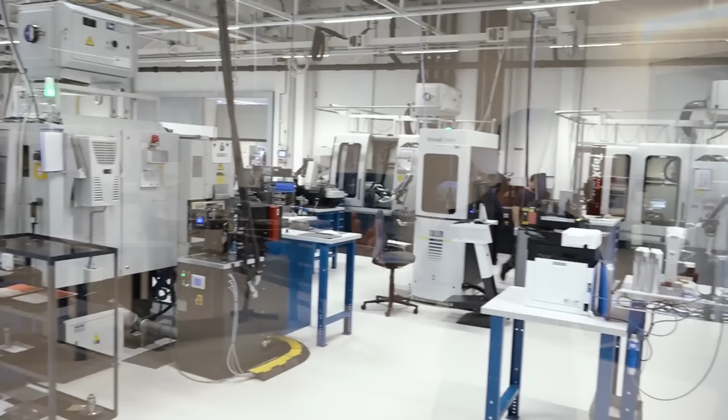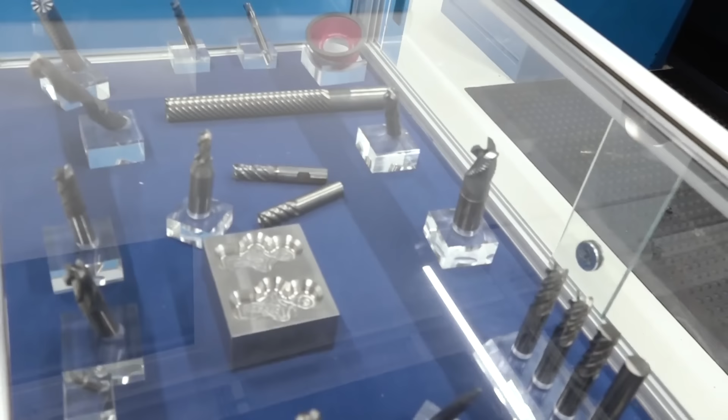I'm already seeing what looks to be dozens and dozens of grinding machines, which is obviously the core of what you're doing here. Absolutely - solid carbide is our passion for precision. You see here different tools, mostly different diameters and lengths, but more of the bigger ones here. So here it's really going on with powerful grinding technology on these Reinecker machines. You see also how we produce those tools: first there's always a rod, we put it in the machine's clamping system, then we go with the grinding wheel in a slotting process. The main material of the tool gets removed, and then finally we do the sharpening and finishing on the front part of the tool. You see all the other ones with a lot of teeth here - those are finishing tools. We grind for such a tool about 60 minutes, so an hour for one tool. There are other ones we produce faster, but it's really different here.

You know, I come from the machining world, and currently we discuss all the time doing things in one operation and reducing cycle times. Are you doing the same thing inside the grinding machines - putting in raw material and taking out a finished cutting tool, doing your best to combine operations and take cycle times from say 30 minutes down to 5 minutes? Are you doing all of that to keep up with demands, especially since you guys continue to grow globally?

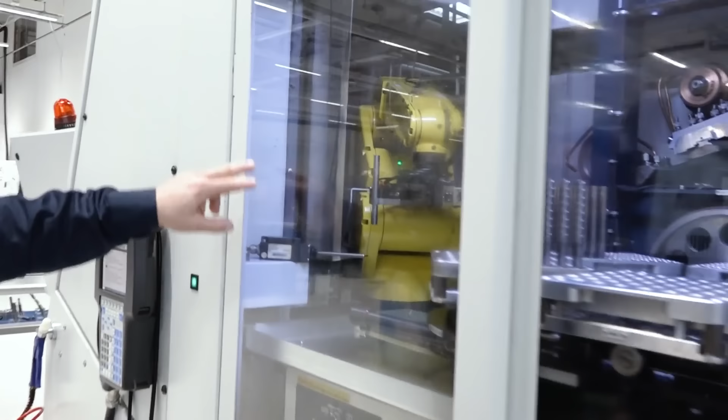Yeah, absolutely, it's important. We're standing here in the Switzerland production, and the salary is part of the price to produce out of Switzerland. Most of our products go out to Europe, the United States, China - I have international competition. Producing out of Switzerland is expensive, so for sure we have to optimize our process. Therefore automation is really important. When you look at a machine like that, you see the robot still holding the rod prepared for its operation. At the back side we see the different grinding wheel packages. We have optimized during the last year not only the grinding strategy but also the grinding wheels, with metal bonded wheels that we can dress with EDM technology.

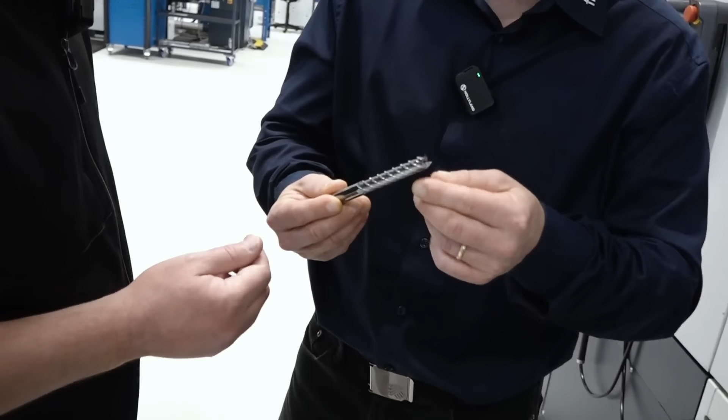So that's really important. And I look at those products here - this is a multifunctional tool. It's not so sharp, it's a steel end mill. So Tony, as he stated, I have sharper ones. Good news, thank you. Yeah, but I'll show you that afterwards. The thing on this machine is also 6.3 times the diameter in length of cut, so your machine in one cut machines a whole workpiece. But what does that mean for us here? I also have to grind that really long cutting edge, so that takes a lot of time.

It's really important that we are performant with our grinding strategy. Stefan, coming from a machinist background, in my younger days I would hesitate to utilize this tool at full cut. But you would advise people to utilize the whole thing, wouldn't you? Yep, absolutely. And that goes into your strategies and quality as well.

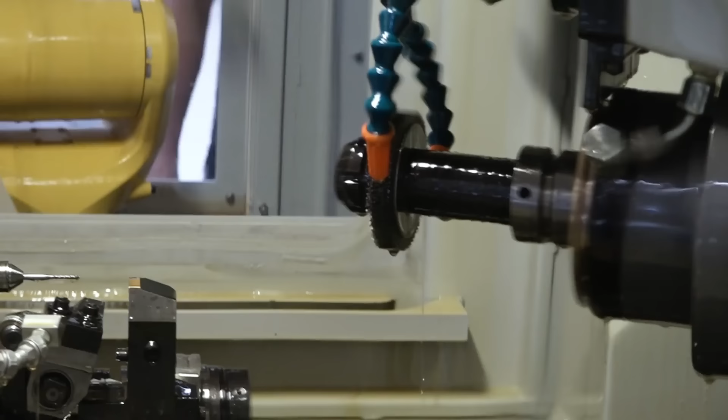The grinding part is one thing, but the developing before is the whole story - creating a tool able to do that not once or twice, but every day. What that means is I have to offer the customer knowledge too: how to do that, the strategy, the programming, all of it. We'll see that later. That's a main part of Fraisa's intention - giving not only high performance products, but the knowledge of how to use them.

Stefan, that's one of the major details I want to talk about on this tour - the in-depth wisdom that you and your team provide to your customers. You have milling strategies, you don't just offer a cutting tool. I used to get cutting tools and have to figure it out on my own, but you offer milling strategies. That's a segue we'll talk about in a minute.

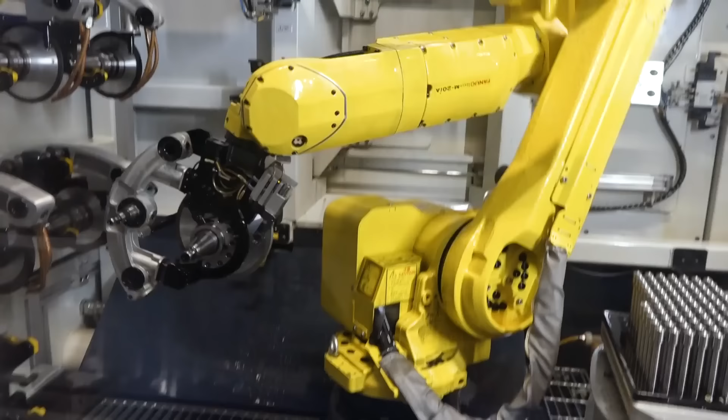I want to step back to the importance of automation. You've already pointed out the robots - I look around and see them everywhere throughout the facility. I see a few people here, but the majority of those machines are running on their own. What do you think is the importance of automation here?

The importance of automation is, for sure, the infrastructure, but also the products that can integrate into an automated production. So in development I still have to think about how I can produce this tool, in which tolerances I have to be really precise, and where perhaps I have a little more room to increase tolerance. Focusing on production development is really important.

And on the other hand, we invest a lot of time yearly to make automation better combined.

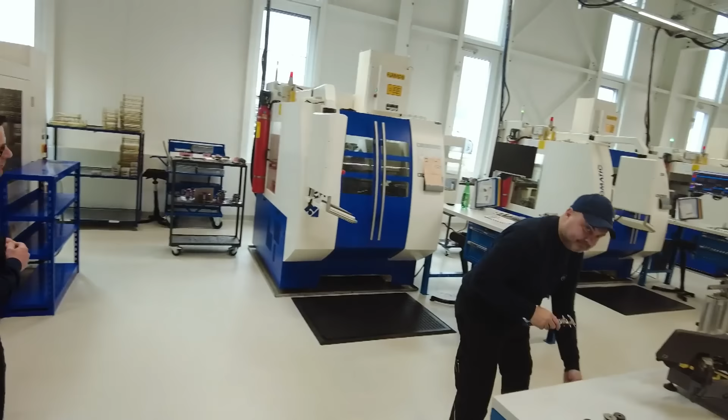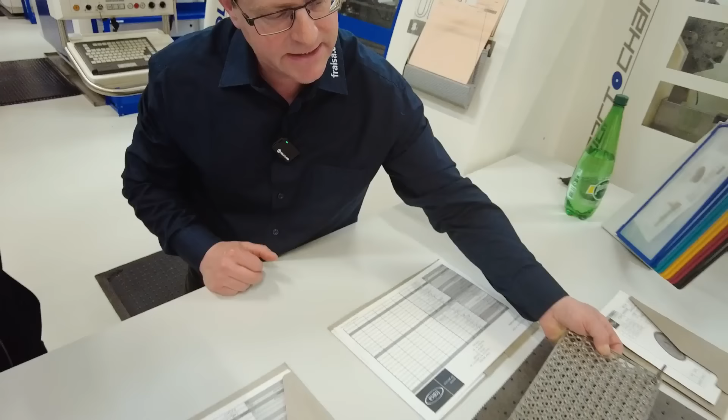You see here, for example, our smart pallets - perhaps we go over there, we will see that. So I know at the beginning of production, with its smart pallet here, you see the RFID chip on it. The tool rods get prepared before, also with the robot, in the smart pallet, and from the beginning I know exactly this is this tool, this is this order - the machine knows it, and finally this pallet goes until the end of production with the tool. That's also one part of automation.

And for sure you see here also the grinding wheels. The grinding wheel is such an important element of our production - for the quality, for the wear on the wheel, the stability of the process. All of this combined finally makes automation even more performant than it's been in the past.

Truly a great answer, Stefan. Thank you for sharing that. Let's slide over this direction - we have so much to see today.

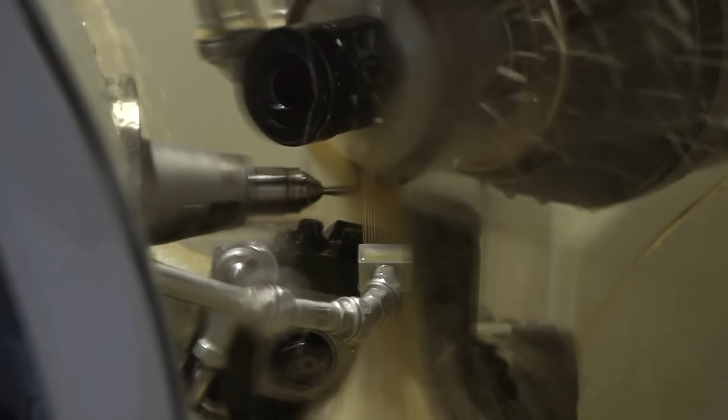I want to go back to what I segued to before, because when I think about Fraisa, I think about a company that started in 1934 - so over 90 years of development, and you guys pride yourselves on being the best. This quality product, from the design, from the automation, to the coating, which is so important, to being able to measure everything, because you can't make something if you can't measure something, right?

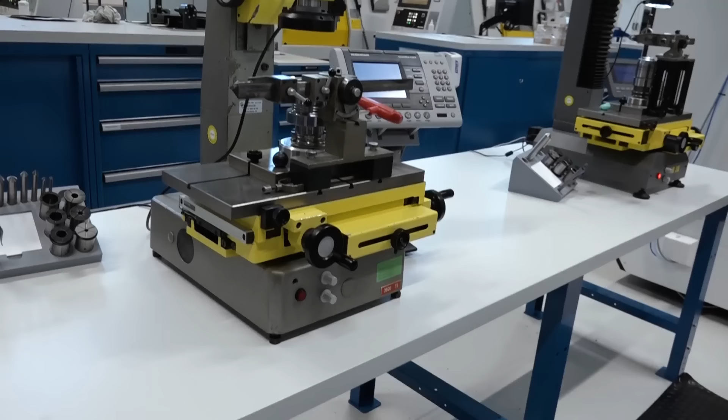Absolutely. And your philosophy, stepping back to what we brought up earlier, is you want to make sure that when people work with you, they have a full solution. You've created the ability on your website to pick a tool and understand the tool and the process. It's not just about calling and saying, hey, I need a 10 millimeter tool and I'm cutting aluminum, or as we say in Europe, aluminium. We're not doing that here.

You are giving a full solution. Can you describe to the audience what 90 plus years of dedication to that understanding and partnership does for anyone who invests in a partnership with Fraisa? Yes, thank you very much, Tony, for this question.

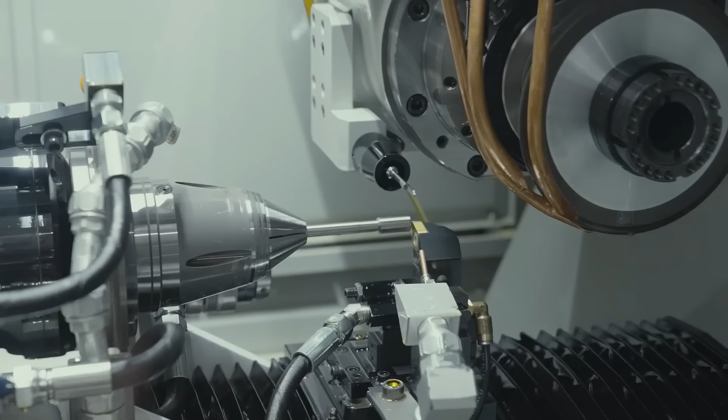And so the basic of all that, as you said, is 90 years of experience and culture. For sure, we began with the technology, the tool technology, the performance. That is the base. So a tool has to work, and it has to work daily and annually, always on the same performance level. But as you said, that's not enough. The performance level is today so high. The question is always how we transfer this performance level to all our customers.

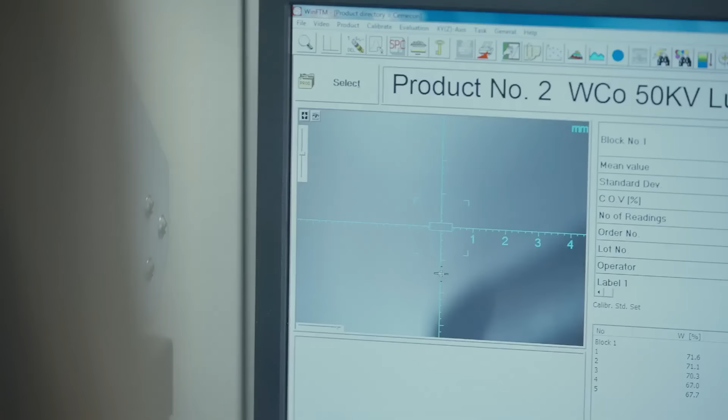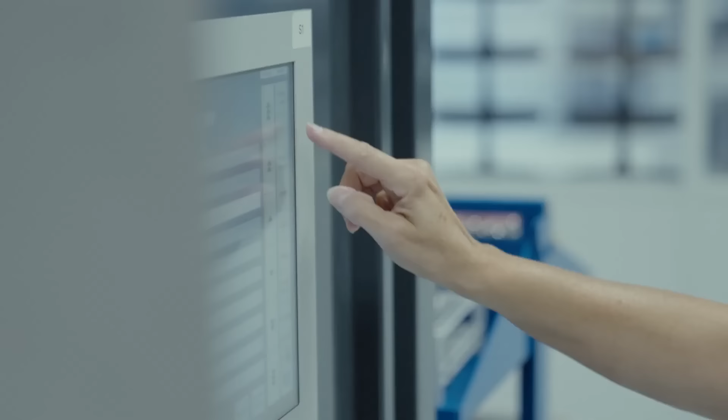So we have to give knowledge with it, and we integrate that in our tool expert, in our tool software. So therefore we invest also a lot in trials, in developments to do that. But finally we need also partners to create this whole story, this milling system. We need partners in automatization, in production technology, but also in applications technology. We can't do that ourselves.

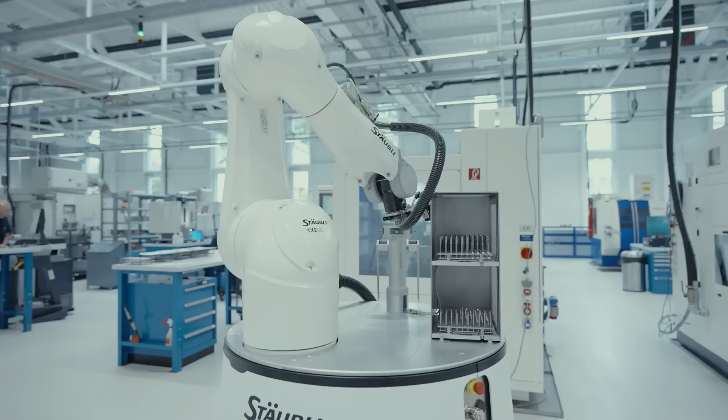And one important part: it doesn't help if we are just freaks and specialists here. No, we have to transfer it to the market, and therefore our sales, our application engineers are daily with our customers, guiding them, helping them to implement those products and this quality and this performance, understanding what are the needs and the problems of those customers, helping them and giving us also feedback. So that's a sharing of knowledge, of culture, of willing to go together into the future.

And that's what we are standing for. So we are really open to discuss, always with transparency, what is to do, where we want to go, where perhaps we have certain opportunities to work on. And then we go in, and always be also critical and validate ourselves so that we can guarantee quality.

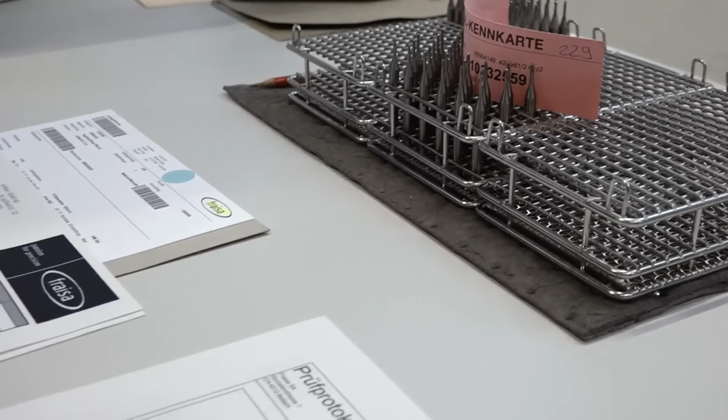I can give you here, for example, this tool. This is now a high precision ball nose tool. It's not the most precise one we do, but you see here the tolerance that we've got. We are talking about microns here. So the radius of the tool is plus 3 micron minus 6.1, and look, here is how it's measured.

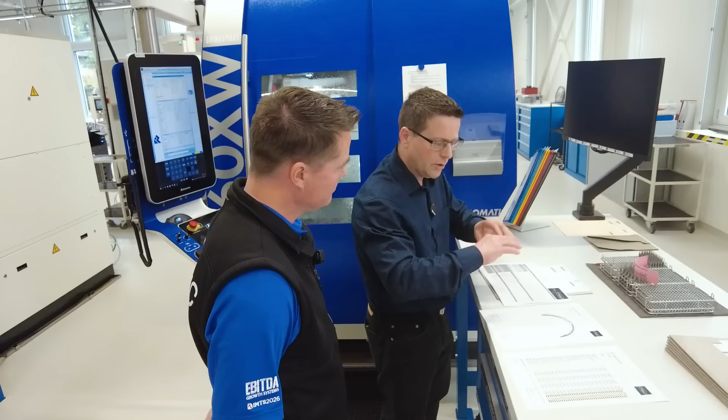And that's also a Fraisa element. The tolerance of a ball nose is over the whole nose, and you know when you have two teeth, it's really difficult to guard this tolerance at the front of the tool. And look at that, how many measure points it takes to produce here to hold exactly this tolerance. For our customers, it's so important that they can finally get exactly this diameter, program it in their CAM program, and they know the mold finally is the quality I have to achieve.

So that's also a service that we give with our products. For sure, the performance, the tool lifetime of the products has to be state of the art, but here that's an additional one.

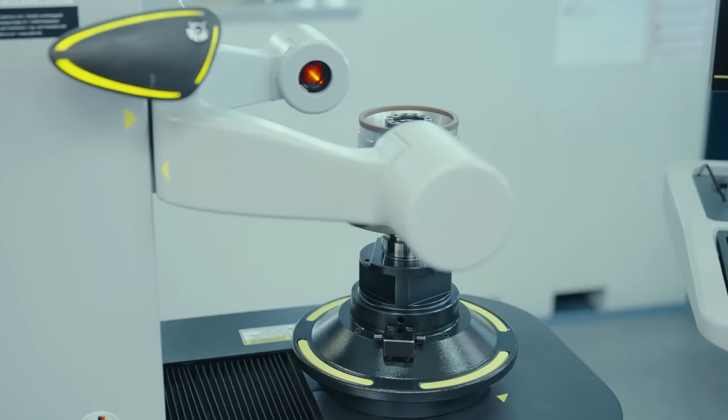Something I want to slide into, because we're going to head in the general direction of grinding, and that's another one of your areas it's quite fascinating to me. But along this journey, I want to talk a little bit about your eco-friendliness and your awareness of energy consumption.

Energy consumption has been an issue around the world over the last few years, with costs doubling, tripling, quadrupling. And it is very important to you guys here at Fraisa and some of the partners here in Switzerland to do everything you can to reduce costs. Would you mind describing what efforts you go into when you design a cutting tool to maybe reduce energy by 20% or 10% or 30%? And can you translate that for the audience so they understand exactly what that 20% means, maybe comparing it to driving a car or something like that?

Yeah, great. Yeah, absolutely, Tony. Thank you very much. That's also a personal intention, to reduce energy consumption. And we have still a lot of possibilities to do that. I can give you an example. I've developed a tool concept that we launched in 2023.

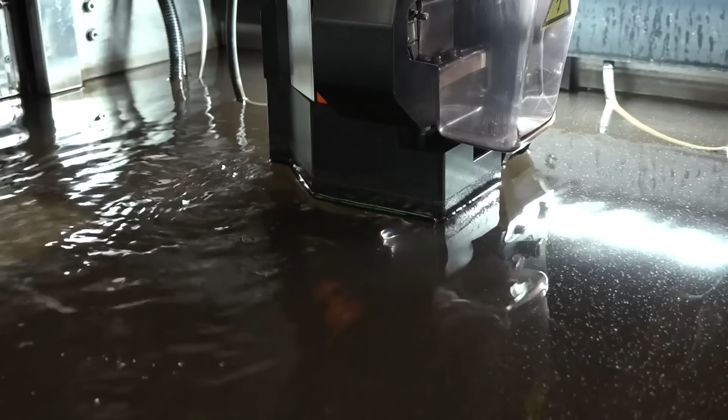You're far more familiar with this than I am, but I know that the concept of machining a part and the concept of making a tool have a lot of similarities. You're constantly trying to multitask inside a machine to create new geometries for eco-friendliness, part production, or longer tool life. In this industry, a lot of folks would probably agree there's a constant competition between software, cutting tools, and machines. At some point the machines are ahead, sometimes the software is ahead. Currently, cutting tools are ahead of everyone, so everyone else is trying to catch up.

So instead of making the coolest and best technology, what you're really trying to figure out is how to make these tools last longer and how to make more of them within a machine in a shorter amount of time. That's the concept of this whole grinding area, isn't it?

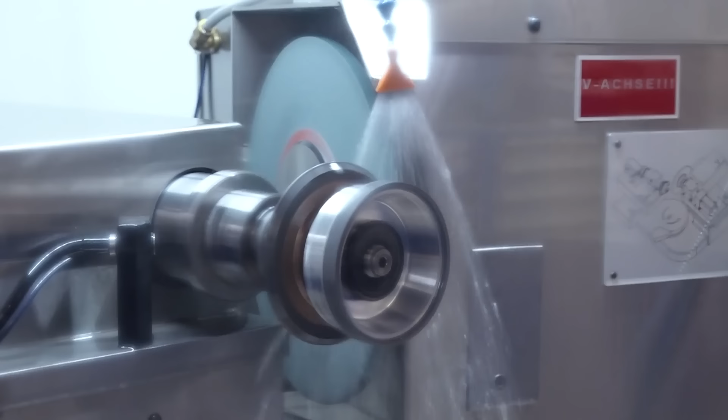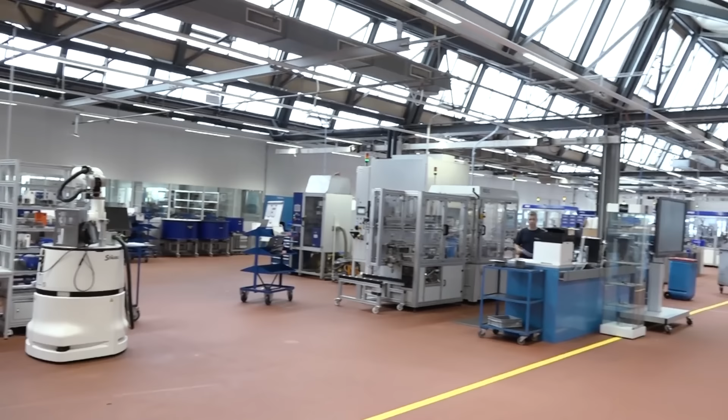Yeah, absolutely. The grinding wheel and the perfect dressed grinding wheel is the base. You saw all the machines and tools there - without the grinding wheel, nothing happens. That's why this department is named the Grinding Wheel Competence Center. The dressing of a grinding wheel, the quality of the grinding wheel, is so important because you want to hold that tolerance, those microns, throughout the whole series of production of those end mills.

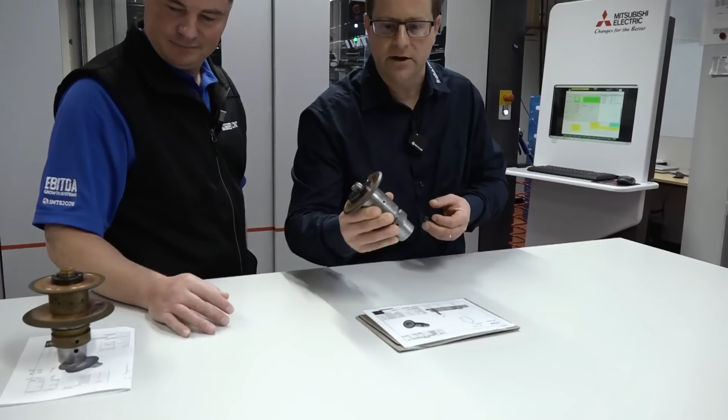And therefore those specialists have special grinding wheels, also developed with our partners. The partnership is important - we can't do that ourselves. We receive the grinding wheels, metal bound grinding wheels, or dual grain grinding wheels. This, for example, is something really special.

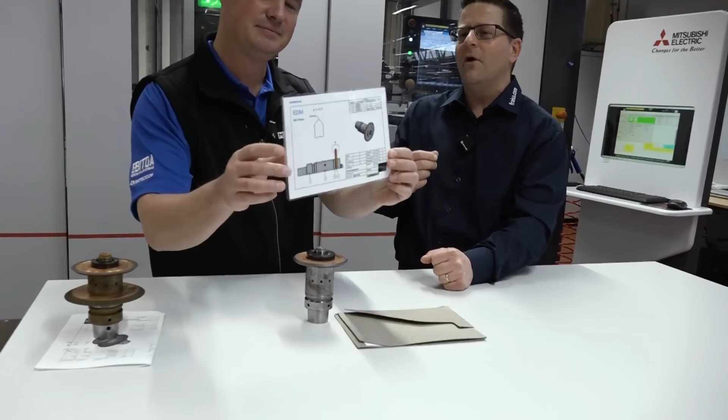This is a grinding wheel for a chip breaker - a special chip breaker system that we developed. I will show you that afterwards on a machine, and I also have high-speed camera sequences showing you what's going on with such a chip breaker. But look at that - that is such a special form of this chip breaker. The transitions of the chip breaker are so smooth.

And we developed this - I invested about 7 years. 7 years, I lost a lot of my lifetime years. But you know, we are all fascinated, so I invest that gladly.

It's so interesting - you see here now a grinding wheel, you see it in a machine, and you will see the result of the product on a machine. The customer is satisfied because the right chip length in an automated machine is elementary important, because otherwise you can't machine safely, since the whole table gets filled up with chips. So you see what a systemic development, production, and sensible story means - it begins with the grinding wheel and ends with the customer being satisfied because his production can run automatically.

Amazing, amazing. All right, let's slide over this way, Stefan, as we move into an area I would lightly describe as the beginning of the end process, where we're starting to clean it, put on coatings, package it, and we're going to show all this. Would you mind describing your company culture here as well?

Because you've recently won an award that I would describe as for the people, by the people, with anonymous posting - and you know how mean people can be online when they have no regard for anyone because you don't know where it's coming from. And yet you guys won that award because your culture here really takes care of one another. Yeah, absolutely. Look, you see a lot of machines, you see a lot of technology, but the core is still the human, the teamwork.

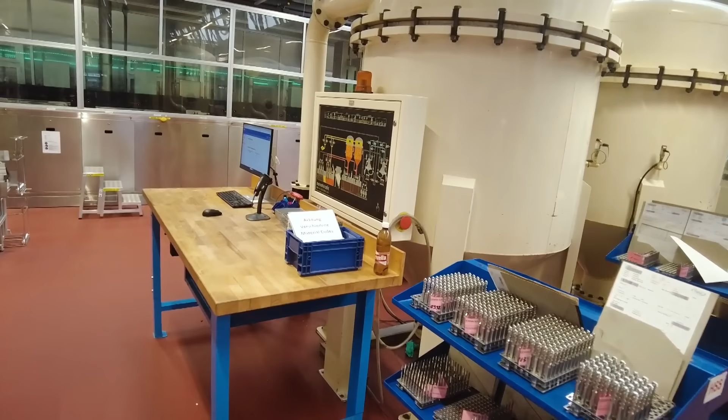I can't do that myself all alone. I need everyone setting up the cleaning process. For example, this machine has a specially developed cleaning process with over 13 cleaning steps to guarantee that the tool is really well cleaned before we get up with the coating. So I need their partners, I need humans, and it goes then into the production, so that I can guarantee every day the same quality of performance.

I need humans. Also the measuring, I have to develop the measuring method too. I need people that can interpret the results of what they're doing. And therefore we need teamwork, transparency, but for sure we also need process. That has a lot to do with culture. Be open, be transparent, talk about what's not going really well, but do that always in a manner of fairness and respect.

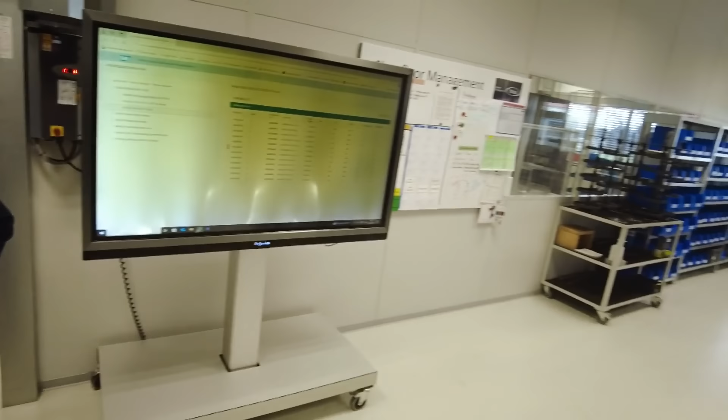Very, very well said. I had to even take a moment of silence listening to you because I love the culture here. You say it out loud, but I can see it in all the people around as well. Every time you walk into a room, people are smiling, working diligently. They look like they love their jobs.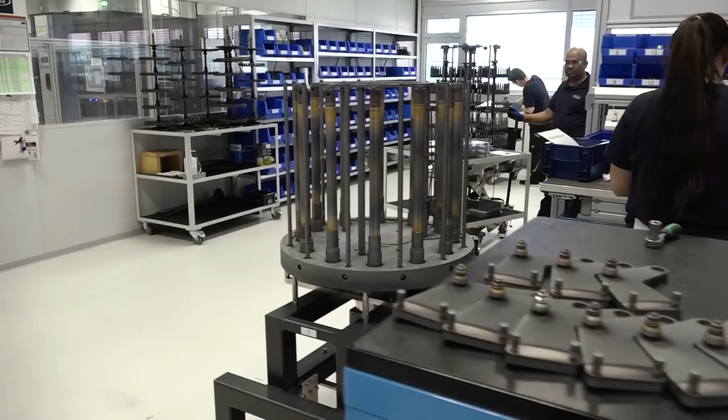But let's segue a little bit from the culture and people to what the audience is actually looking at right now. In this room, we can't touch a thing, can we? No fingers. Put your hands in your pockets. You're absolutely right. So here all the colleagues are preparing the satellites to then finally apply our high performance coatings on a tool. They wear gloves here, because if you touch a tool, even your fingerprint can damage a whole coating charge that we're processing in this room. It's so delicate - you can't imagine how delicate it is when a tool isn't cleaned really precisely.

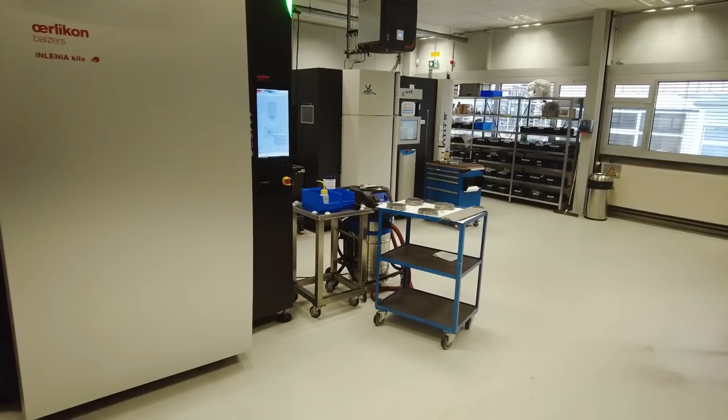You don't see a lot here now, but we are in our coating department. You see different machines running, applying our coating recipes. A recipe uses several hours here to put this coating on a tool, and the influence of a coating is incredible - for the tool lifetime, for the performance, also for the reduction of energy consumption, because modern coatings are so thin or so fine, that has a big influence on evacuation of the chips out of the tool.

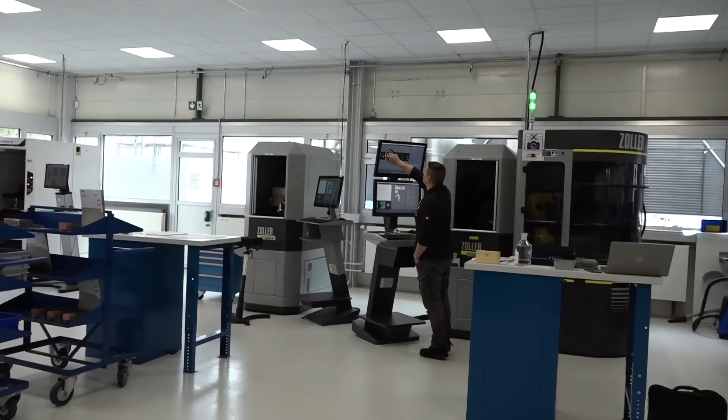And from the outside looking in, Stefan, when I think about a process that certainly you know more than I do - I mean, 20 plus years, the company's been around for darn near... it's been over 90 years. I was gonna say darn near 100 at this point, and by the time some people watch this video, it might be - this video will live forever. But when I think about that, I think geometry has been around a long time. There's a lot of mathematicians out there, a lot of science that goes into these certain angles that are presented to make the right cuts and the correct materials. But I almost feel like coating can be a secret sauce as well. Maybe that area is a piece of also why you're so globally successful and known as, if not the best, one of the best cutting tool companies in the world.

Yeah, you're absolutely right. Is that a correct assumption? Yeah, absolutely. Additionally, I can say that the geometry today, there are still secrets. I'm developing, I'm searching on it. And we always say that the devil is in the detail. You have to go into the detail, you have to understand the detail.

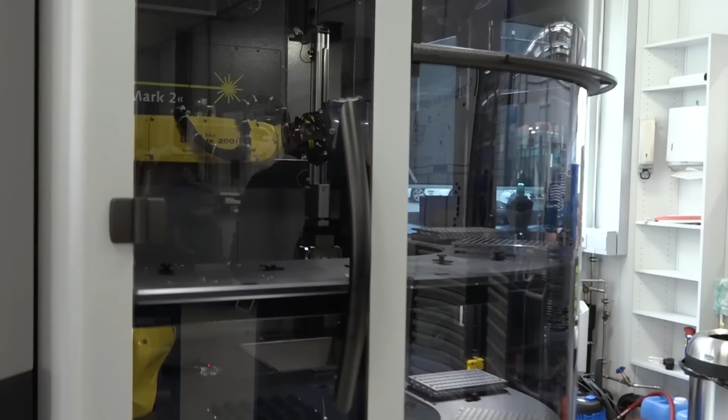And therefore, we've got also here those measuring methods. I can measure that with a 3D scanner—I'd say more macro geometries, I can compare them. On the other hand, we've got really precise measuring machines where I can measure less than a micron, because we have technologies on the geometrical side today. They have an elementary influence, like a supporting chamfer of a tool, which is really complicated to measure and reproduce, and there the geometry is the big influence.

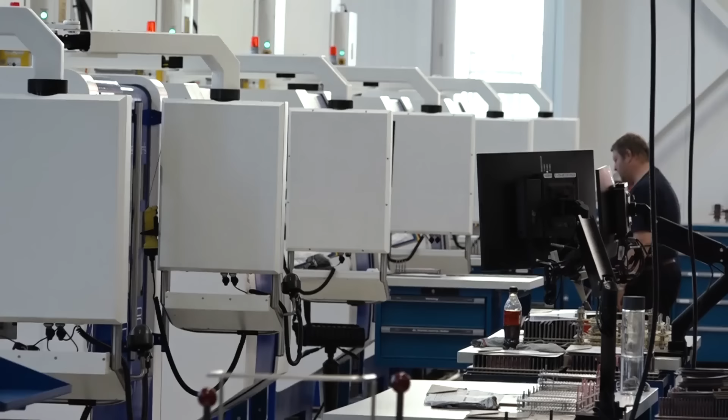On the other hand, when we're machining stainless steel, titanium, or nickel-based alloys, the coating is really important too. So I think it's important to know for which application which tool elements are key. We talked before about efficiency in production, so always making tolerances smaller isn't a good way. You have to know where it's important and where it isn't—that's how we can optimize the production of tools.

This is why I bring people like you on camera, because you are the expert and we get to learn so much together. Yeah, so this is the quality department.

We're going to head over to packaging, but I bet these guys would make the argument that they're the most important people here, right? They're really the quality department. I see them smiling—yeah, that's the most important, they know the importance of what they do.

They're really important here. All right, packaging. Man, I gotta be honest, when I did packaging, I was doing it by hand. You're not doing it by hand—you're doing everything within a system, and you're even being eco-friendly about that here as well. Can we walk through and describe the process here?

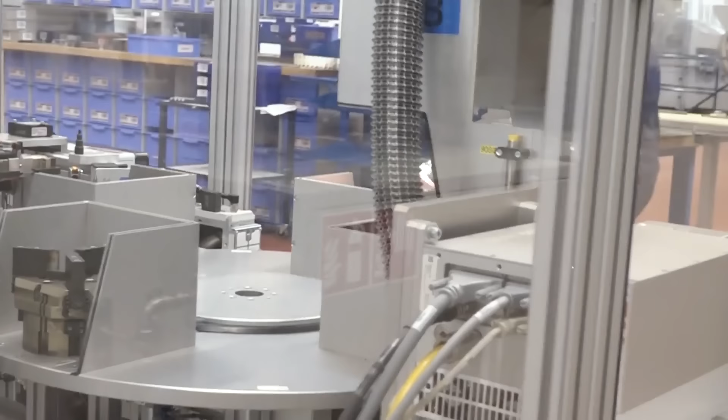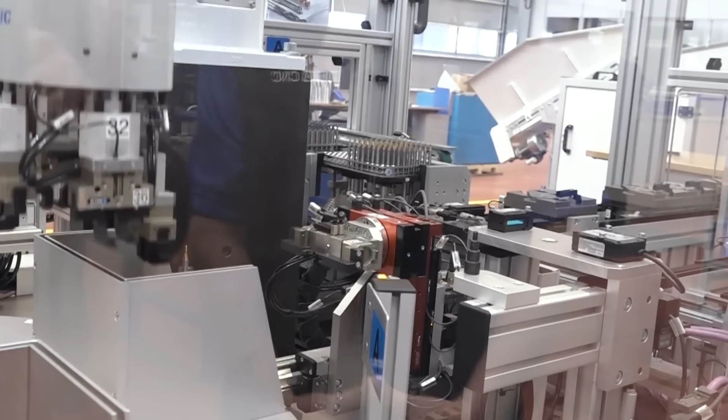Yeah, absolutely, lovely. Look here, the tools are coming, they're now finished—they're coated. Look at the golden shining tools you're seeing, I think that's a diameter 3 or something like that. The tools get picked by the robot here, and they go directly into this part of the machine. That's the laser—it's putting a unique number on every tool. So I know finally this tool has its own number, and in 10 years when it's still in use, I can say, okay, it was produced on the 13th of March here.

And then it goes on through the station here. This one is now a little bit special. It goes into the packaging, the blue one, into the package, and closes the package.

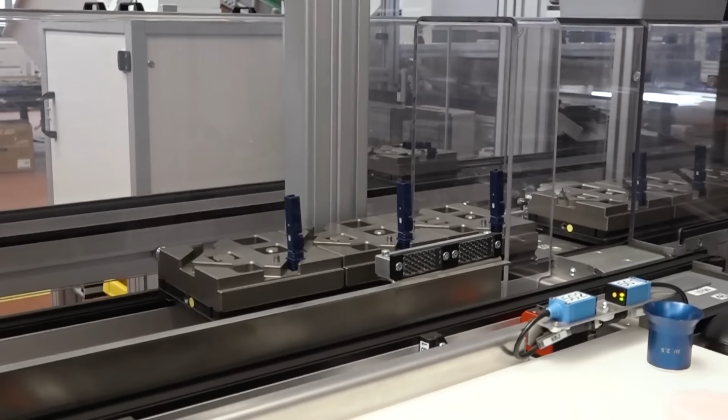You know, while we move on to this next section, I can move almost as quick as that robot—how about you? Yeah, well, I'm almost as quick, I could probably do close to the same. Obviously I'm kidding, that thing is flying, it's really fast. And he has to go to the restroom, but the robot doesn't stop in the evening—he works on, and that's the big difference. Even if the robot is a little bit slower than you, he works.

And that's also boring work—we're always saying here, Tony, the boring work has to be done by a robot. Dull, dirty, dangerous, right? Absolutely. And we have a lot of other stuff that our good colleagues are still doing here. So, eco-friendly packaging, correct? Absolutely, friendly packaging, recycled packaging.

Well, it looks like we're getting to a completed product, which means we're probably getting to the end of the tour as well, as you've taken us all the way through. And I see that when a product does get completed, all the data is collected from that as well. Absolutely—all the data for every single product is finally saved, stored in a database.

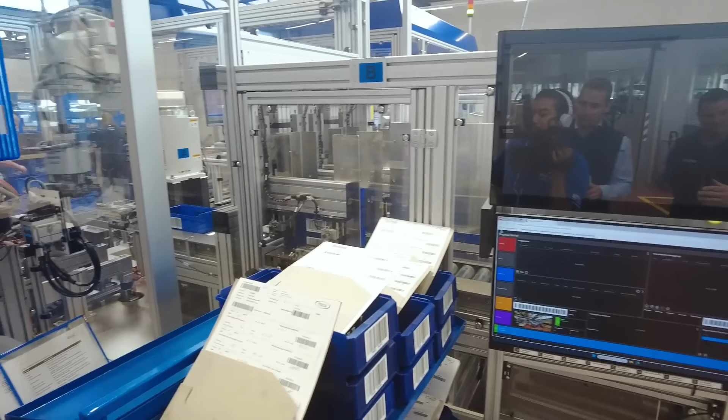But Tony, yeah, the product is still finished here. So the package here goes then finally to stock, and our customer can order the product here.

Well, beautifully packaged, but it's not yet finished, Tony. It looks finished, we made it to the end of the factory. No—what am I missing? No, here it begins, Tony. What we want to do with the product sitting in the packaging is we have to machine with it. And what does that machining mean? Machining means also, Tony, that we need good employees, trained employees, new colleagues learning how to machine. You'll see that also CNC programming, which you know well. A little bit—yeah, I know that you know it well. So we need knowledge, and therefore we have our department here building up new apprenticeships.

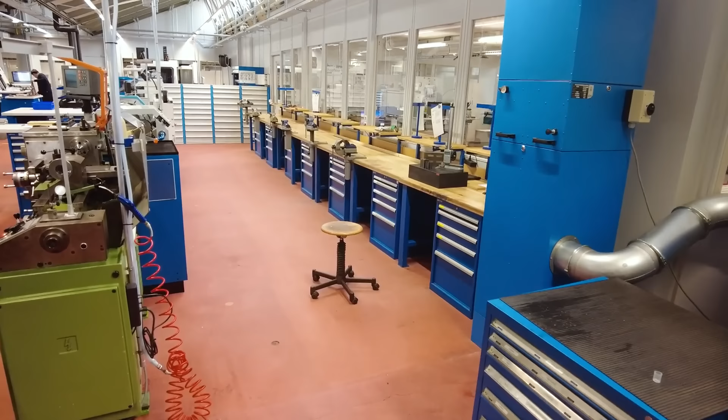One of my favorite topics, brother. Yeah, I remember well in the 90s as I made my first CNC experience.

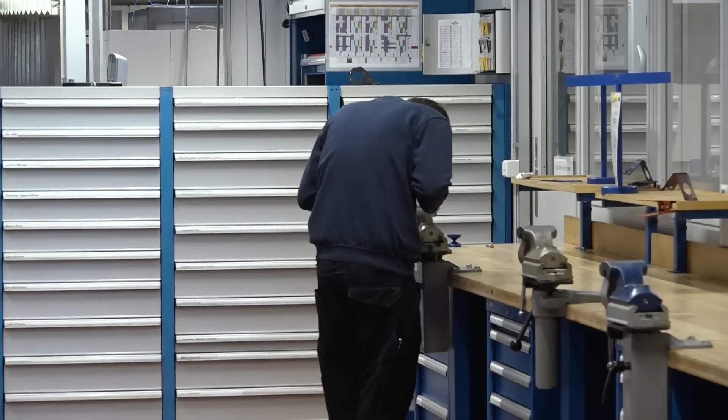When you look here, Tony, you see also conventional machining, which is how we learned and we've kept it around. You feel the chips, drilling and turning and milling, also conventional. This is important still, that you have a feeling for what's going on - the forces, the temperature, perhaps also the mechanics, what it means when a wheel turns and the material sticks up or whatever. So those colleagues learn how to handle all that, and for sure also grinding competence, but also CNC competence.

Stefan, I think this is where we stop for now, but I think you have an entire machine shop we have to dive into, don't you? Absolutely, and that's my favorite area. Oh, I love that too.

I like the production, that's necessary, but what's more beautiful than machining, making chips, understanding what's going on, and feeling the power that we invest in a tool. So Tony, I'd say we go over there into our lab and make some chips.

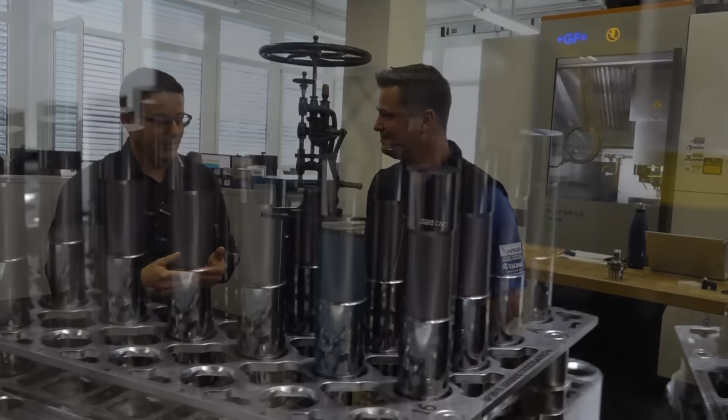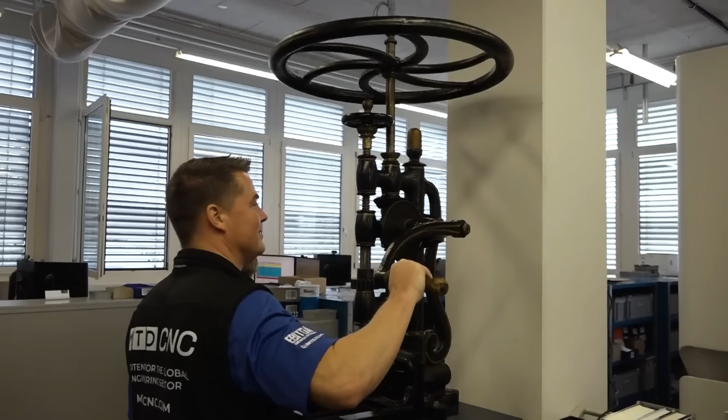Stefan, I want you to clarify a rumor for me - I've heard that you guys do R&D 2 to 3 years into the future, to make sure all these tests are done correctly before ever releasing something.

Yeah, absolutely, that's true. I'm still finishing now, beginning of '25, the products for '26 I'm still developing, and I'm already working on 2027, 2028 developments now. It takes time to understand. A product I'll show you afterwards on a machine, I develop over 12 to 24 months, and make about 70 prototypes to finally define the product, to reproduce it, to know the technology - because I don't only have diameter 10, I've got it from 2 up to 20, from short to long.

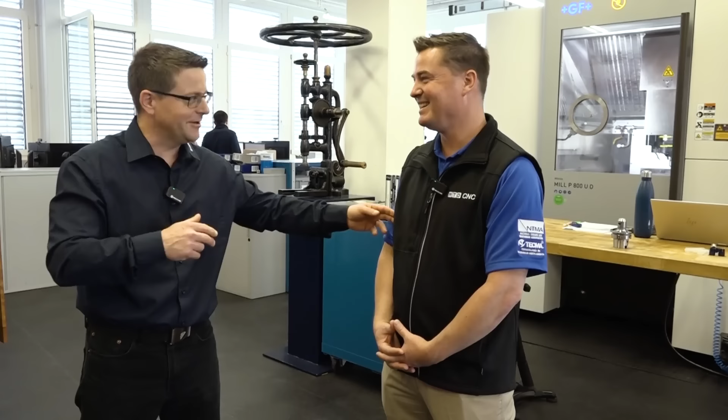You saw the 6.3 times diameter over there. That means you have to test it, otherwise you won't have the feeling to put it on the market, you won't sleep well at night. I couldn't imagine throwing something like that out into the wild and saying good luck. We think it works, but you go ahead and spend a lot of money on our tools and try it out for us - that's not how it works.

Do you have a demo set up we can take a look at? Absolutely. Here the machines are machining for a certain time, the tool is in action, and after a while we look at the wear. Wear analysis is still one of the most important things.

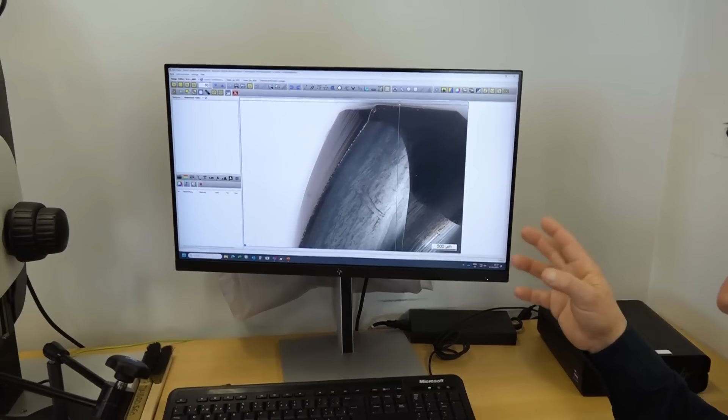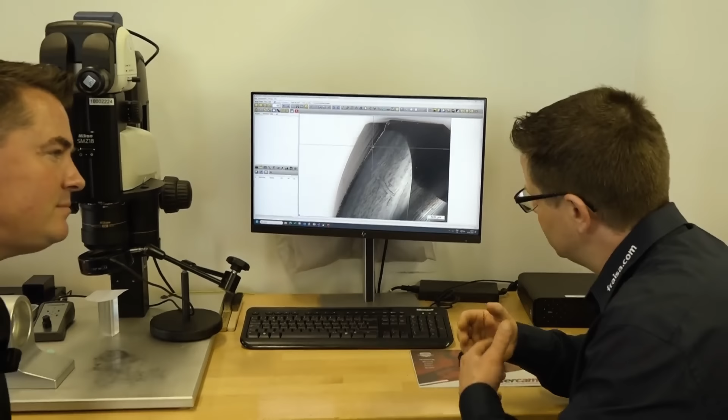You hear the noise, you can measure the power consumption, force and all that. But look at this now - 90 minutes machining in a construction steel, which is not really easy to machine. You see the wear on the tool - look how regular this wear is, you don't see a lot of material adhesion here. So that's what we're doing: machining, comparing tools, understanding the influence of the geometry, whether it has to be positive or not. And as I told you in production, Tony, this chip breaking system for automation.

So I've got here an example to show you what that means. What we are seeing here is a tool, and you see here a chip built in the front part of the slot and the end part of the slot. And when you look at how the chip gets formed...

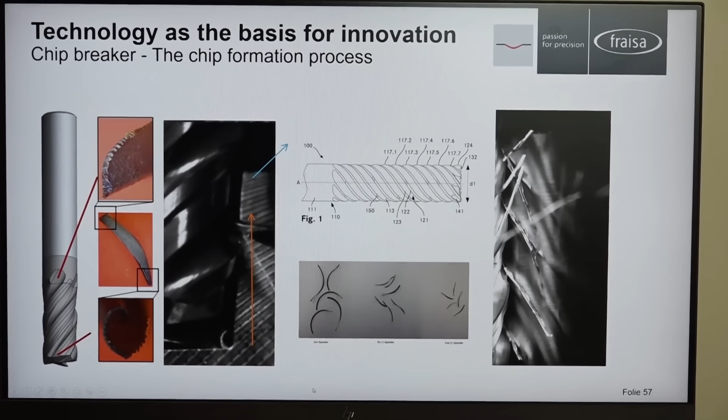That's so impressive. It's incredibly impressive. I have a fast camera to do that. You must - I was thinking real time. Obviously, that's in jest and humor. That is a really powerful camera to be able to collect that data. Absolutely, up to 200,000 pictures per second, Tony.

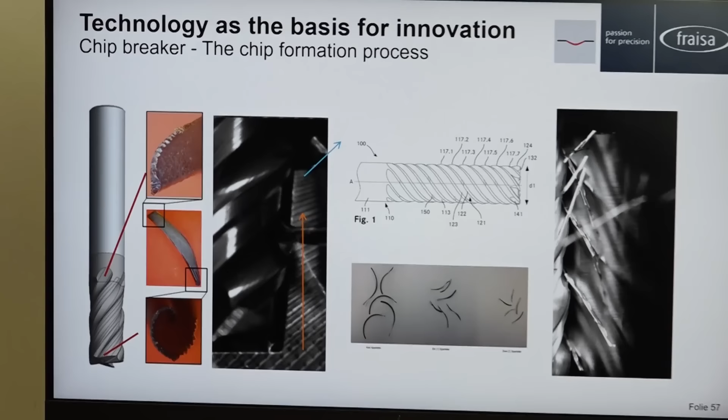So with a setup, really specialists can do that. That's really helpful, you see a lot of things, but now look at that - the chip goes up in one way, so it's a long chip. Therefore I have to integrate a chip breaker, interrupting this process, building the formation of a chip, and that is what we are seeing here on a second video.

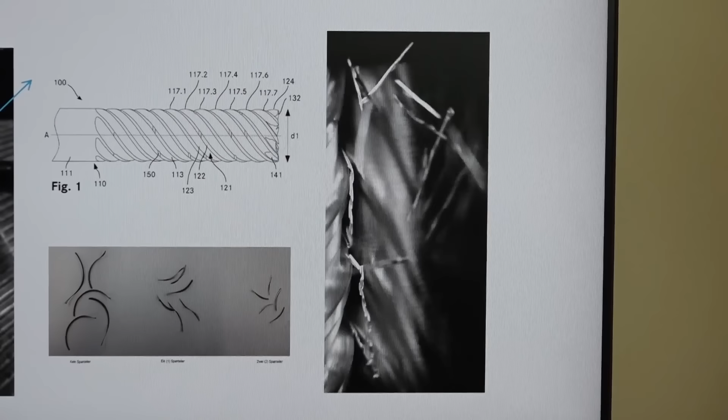This is also a long tool in action, look at that, and then here you see finally the chip breaker. Chip gets broken, a new build-up gets up, and like this we can cut the chip into several pieces. That makes it more efficient to remove it out of the workpiece, out of the table of the machine, without interrupting the conveyor for the chip transportation. So technologies like that are really important to understand what's going on.

Would you say that recutting chips is one of the quickest ways to wear down a tool before anything else? That's why we're trying so often to either get coolant where it's supposed to be, use chip breakers, but regardless, we're trying to remove that material and get it out instead of rubbing or cutting the same chip twice and creating that dullness in our tools.

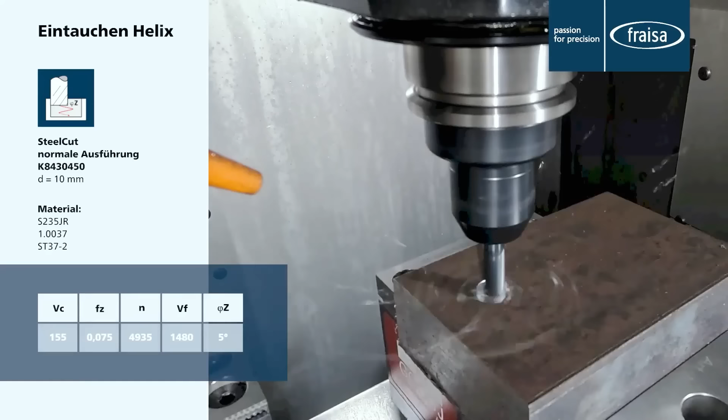Yeah, for sure. That's for the cutting edge, once again, going through its own chip securely. That's also the reason we integrate lubrication channels into most of our tools, and also the form of the chip. That's really important for a profile tool, for example - they can hook their own chip, which is a really bad situation when a chip can't be removed. So yes, that's our part here - thinking about and looking at the chip formation, really important.

I will show you afterwards a photo you will love. I love chips, Tony, I even go diving into the chips because it's such an important part of our work. Perfect, let's continue our tour. R&D is so fun, and I would pay to see you dive into a bucket of chips, by the way. Since you've already brought that up on camera, I'm going to hold you to that. We're gonna try and make that happen.

All right Stefan, from R&D we're headed into production, but along this journey we've seen the production side of things, from you making the tools to utilizing the tools, testing the tools, packaging the tools, and the automation, everything that goes into it. I've known you to be around for over 90 years now, and your dedication to your clients takes time, but gives results, and it's a long-term relationship that you continue to build.

As part of that, I've heard that you also do a retool - you make sure that if a customer invests in your high-quality product, they can utilize it more than once. They can send it back to you, use it 2-3 times. Now historically, when I was ordering tools, I always hesitated because I was told I was losing quality. But I'm not losing quality with you - I might lose a little diameter. But can you describe your retool process?

Yes Tony, that's a really important discussion here. You see, we invest a lot of energy producing those tools, so it's important that we can use this invested value several times. Therefore it's its own part of the tool development - we develop the retool, the resharpening on one hand, but also the recoating, reproducing this 100% performance guarantee that we give to our customer. We do that with our colleagues in Germany, where we handle this retool process, and we can guarantee this 100%. I'm absolutely with you, because the diameter is less, the stability can't be the same, the deflection of the tool.

That would have been my question. I'm absolutely with you, with the same parameter. But you're absolutely right, we have to develop that, also changing small elements.

A tool doesn't look the same way, but it has to work on the same way, and therefore we make also validation. Every tool gets validated, and look here, Tony, what I've prepared. This is an example of a validation.

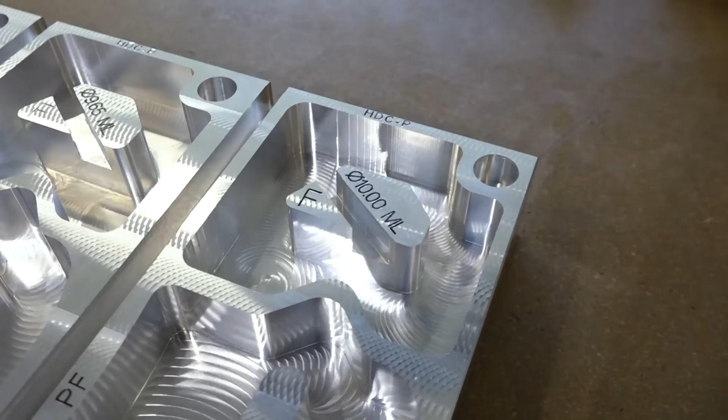What we are seeing here, we see 3 times the same operation. The first one is a diameter 10, an MFC aluminum tool, really performant tool, and you see the different operations: roughing, high dynamic cutting, finishing, super finishing. Then we go to the next one, the 9.65 - it's once regrinded, the diameter is less, and we test it with the same parameters and compare this performance. Finally it goes down to 9 millimeter, meaning 10% of the core of the tool is less, and even then we can guarantee the same performance, the same quality.

Look at those shining, bright surface quality that we reach, and we are really proud of that. That's for us a guarantee we give to our customer, and we test it too. It's not only something we are telling, it's really something we're making seriously - testing, and then finally guaranteeing to the customer this 100% performance guarantee of the retool.

Not only can I see your handsome face in the reflection of a super finish, but I'm saving money as well by utilizing this process, aren't I? Yeah, additionally, and that's a value that we're giving with our tool. Regrinding a tool makes the price 30% less compared to a new one. So when you make the total cost calculation, you see that your price dramatically decreases, and the value is once again more sensible, economically sensible.

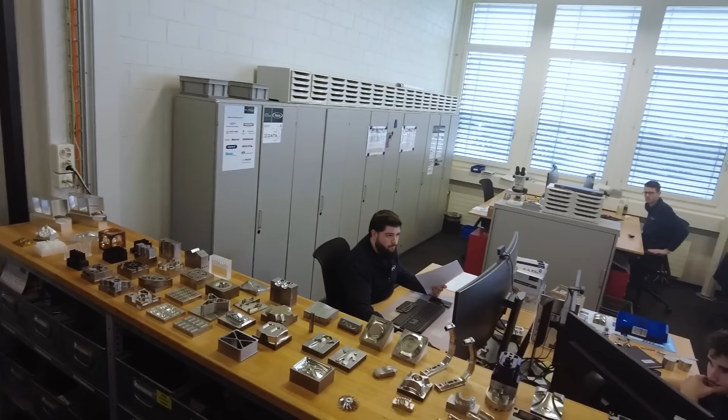All right, now we're in production, and these guys, I think they all want to be on camera because they love the camera so much. So now we are in the freak department. The freak department, is that what we're calling them? That is one of the best, the stunning department. Here now comes the product to its presentation, and that's what we are doing. Yeah, I would want to be a freak in here too, I gotta be honest.

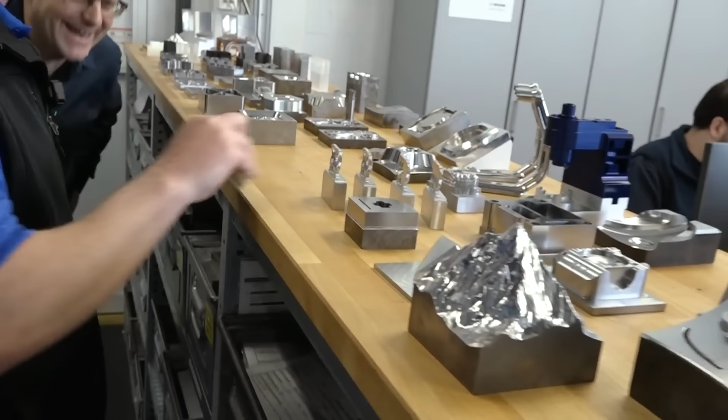You're always welcome. Do you have any favorite projects here? As I look around, some of these are really cool. Look here, we machine high-speed steel, a 66 Rockwell here. Oh my gosh. Yeah, we go through it like butter here. That's a high-speed steel coated tool. That's incredible, that is a fun project.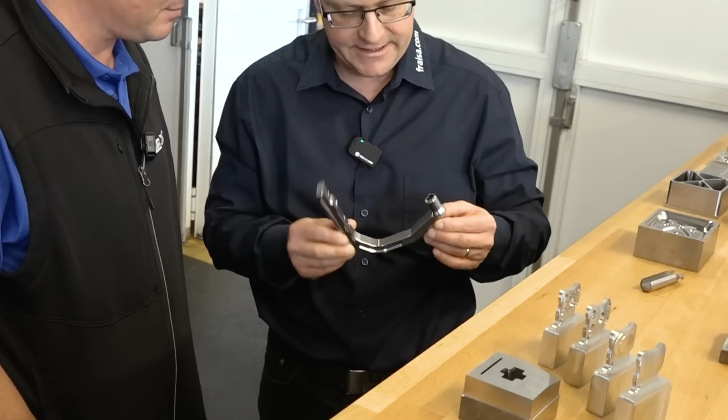Stuff like that here - this is the aiming device project we did together with our partners, especially REGO-FIX was integrated here too. This is also a Swiss project we've done, the Matterhorn. You have to visit, you know it? I do, I've seen this at my friends at REGO-FIX - in fact they just made me a small version of this. Yeah, you can increase or decrease it as you want, but we machine titanium too.

Oh, look at that. Look at the quality here, die mold. That's nothing polished, that's all machine - straight off of the machine, no polishing.

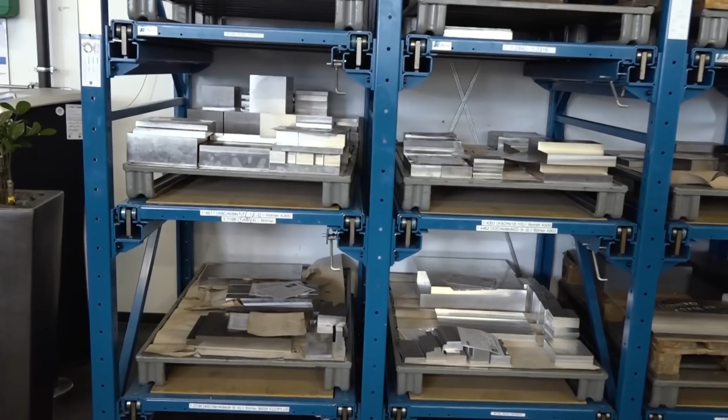Wow, impressive work. So I look here, and you've already mentioned several materials that you've plowed through with your cutting tools. If we spin only slightly, I see a whole wall of material, which I would assume is your investment in the testing process to make sure you're testing all the different materials. Absolutely - in our ToolExpert cutting data software, more than 10,000 materials are integrated there, with material comparison. How did you want to build up this competence?

I have to take up quickly here a titanium, stainless steel - here this is aero aluminum, for example. So I can take it out, put it on a machine, stainless steel here for example, or a block of titanium, making tests in it, understanding what's going on for sure. That is a huge cost component also.

But for us it's so important that we are understanding what's going on, and finally then also helping our customer be more quicker, more safe in the production process.

What I'm realizing is that there are a lot of theories out there, a lot of beliefs. There are scientists that say my geometry will do a certain thing, coatings that say my coating will do a certain thing. And you guys say, well, let's put it to the test, let's see if that theory is real. I like that. And on top of that, you're going live to make sure everyone understands what you're working on and how they can embrace it too.

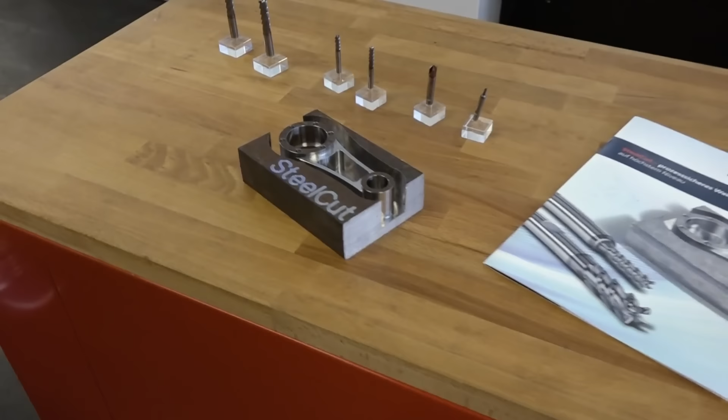That's a product not yet launched, so Tony, exclusively here, you're viewing a new launch product. We're really proud of it. It's an end mill only for soft steel, construction steel. Really difficult steel to machine, because it's horrible what a mess that material is. You have to be strong and hard with it. So it's plug and play here. Plug it in, play with it, it works, it pays off. That's important, and we share this knowledge too.

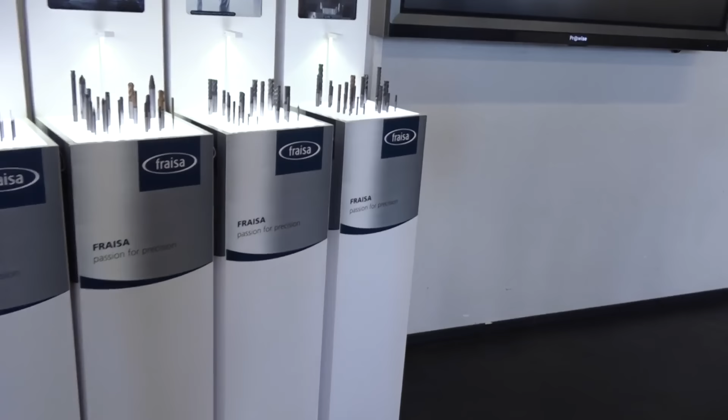So therefore we invest in applications technology for all our products, from the small micro end mills, for example, to cylindrical ones, or this high dynamic cutting strategy, really interesting with highest volume but also with a lot of challenge, I'd say, on the tool side. Up to 60 Rockwell here, you see a different range of tools, and for every tool it's the same process.

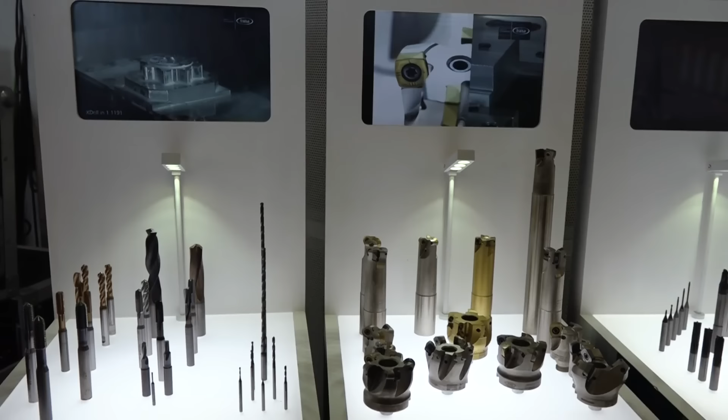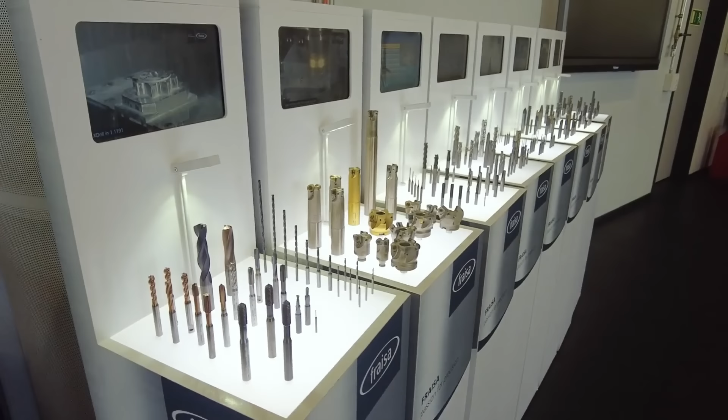Can I bring up something to you, a curiosity of mine? We all know that some of the wisest, most seasoned machinists we've ever worked with are starting to retire. Around the world there's this idea that maybe we have a labor shortage or a skills gap. I'd argue that you guys here at Fraisa, collecting all of this data, because it takes years and years to truly understand what a tool is supposed to sound like, what the vibration is supposed to be, how to utilize it economically. We've already talked about reduction to be eco-friendly, right? But it takes years. You guys are doing that for us. So if we have a struggle bringing in these expert machinists, in time they'll become that, but in the meantime, you guys can be the experts for us in our machine shops. Am I correct in that thinking?

Yeah, absolutely. That's an opportunity, but it's also a threat, a trap. So I think it's important that we share more and more knowledge with our partners in the future, and that we understand where this voyage goes. Is it going, as many say, toward automatic programming, feature-based machining, all that stuff? But nevertheless, we always need data, how it works well and how it doesn't. And yes, there's a transformation of knowledge going on, and we want to help hold and win new knowledge and transfer it to our customers, be in contact with them, and observe what's going on. We collect data through our tools, and hopefully in the future that will help us give support to our customers too.

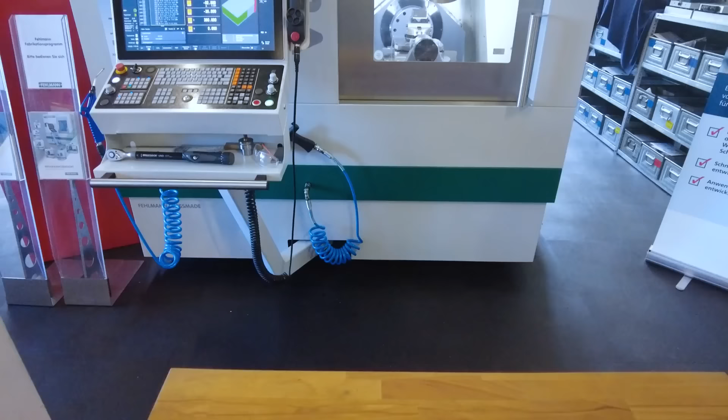No, help me please. Well, I spy on this table a tool that I think we discussed a little while ago, one I was hesitant to utilize. But it looks like you're demoing it, bringing this whole conversation full circle. Is this true? Did I spy correctly? It's a long one. You spied, Tony. That's a really long cutting edge, up to 6.3 times the diameter. And look at that, it's in action now. You said no, that's not possible, but you can machine with a tool like that, and it is possible, Tony.

This is now a roughing process with this high dynamic strategy here, and finally we can also do finishing, and it's impressive. The tool then finally gets into a plunging motion. You have to see this when it's finished the outside contour in milling. Look now at the chip breaker, look how small the chips are, how safely they fly away from the workpiece. So that was not only marketing, this is really the story, and now we have a look at it.

What are we getting ready to see? What's going on? Now he makes a small stop. Now he's ready, now he's gone. Now comes the plunging, and this is exactly what we discussed previously. It's almost like we know what we're doing. We have a saying in the US that I'm not sure is appropriate here in Switzerland: when someone says you can't do that, we say hold my beer, and then we do it.

It's kind of like what you're doing here, isn't it? Please be calm, lie back, have confidence. And yes, Tony, we know we are here on a technical level really, really high. He changed now to the high dynamic cutting. Look at the chips, how they come out. That is what I showed you before with the video.

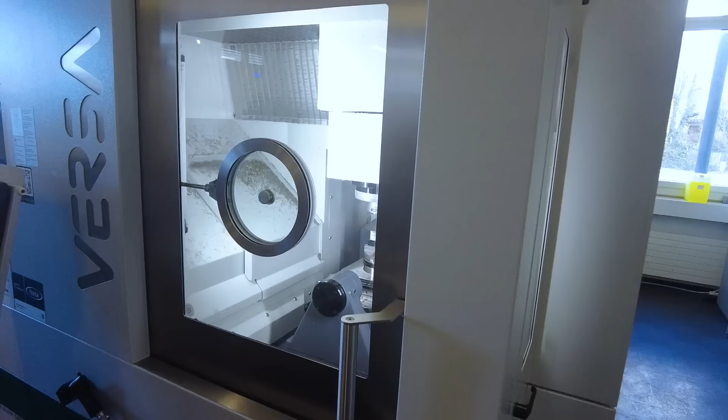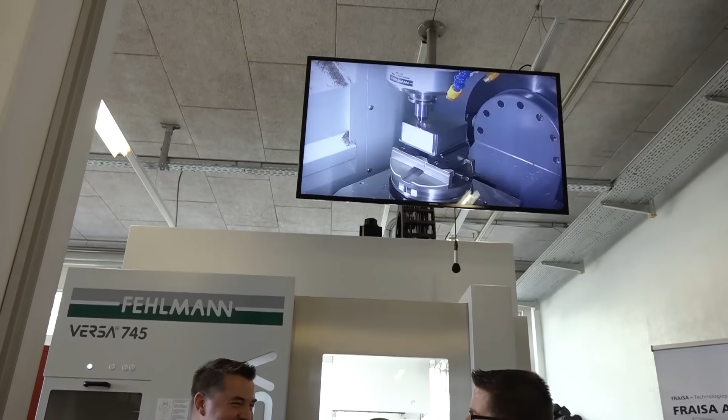It has to be with our culture that we are transparent, also internally. That's the reason we're doing validation of what we are doing - can we hold that? For sure, we learned also, Tony. Not always did we have a hit on the market, and that's also important, that we discuss critically and make a lesson learned, going step by step to this real story that we are working for day by day. And finally, the customer, I give him a call: hey, what's going on, that's working! So it's taking him by hand also for the future, for new projects.

Well, let's slide right over here as we conclude this incredible tour. Personally, let me say thank you for allowing cameras in - it's not every day we get to come into this facility. I see that every machine is running, from R&D to retool, to production and testing, to live streams, making sure everyone has equal opportunity to be educated by you at the same time.

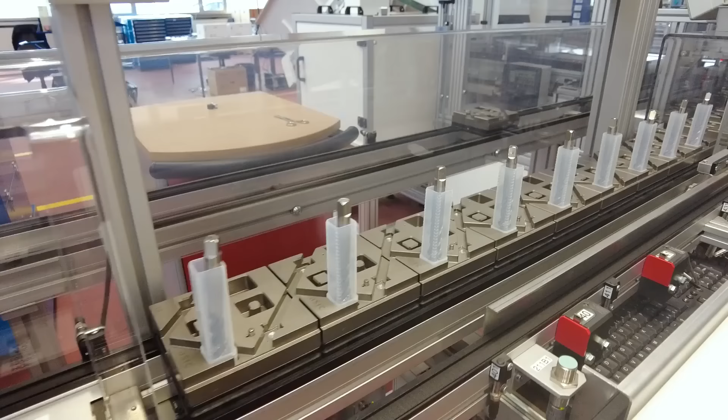We have partnerships that are important - none of us can do this on our own. Are there any closing statements, as my pockets have gotten real heavy today? I may or may not have snagged some of your stuff, but any closing statements you'd like to say about Fraisa, the company, the people, the products, and working with all the amazing companies out there, to invite them to give you guys a try?

Yeah, thank you very much, Tony, for this wonderful feedback. That makes my heart really feel good. And Tony, this is exactly what is the sense - so I go every day in the morning, I go to work. What is the sense to do that? For long-term sense, that is making together a good story.

Having partners makes a good feeling. Going together in the future makes it sensible to invest such a lot of time of our life for that story. And that is my intention, to do that day by day with my colleagues, with my partners, to create success, real success stories. That is also our culture, that we go on in this process, and there is still a lot of potential - I see still in the R&D a lot of potential. My buckets are filled with tasks, and I'm really happy and thankful that I can do that also in the future.

Would it be less manly of me if I cried from your passion? I'm an emotional person, Stefan, that's good, and your passion gives me chills. It makes me want to shed just one single tear. Thank you so much, I'm impressed. Thank you for all of that, it's been such a pleasure. I hope everyone watching has enjoyed this as much as I have.